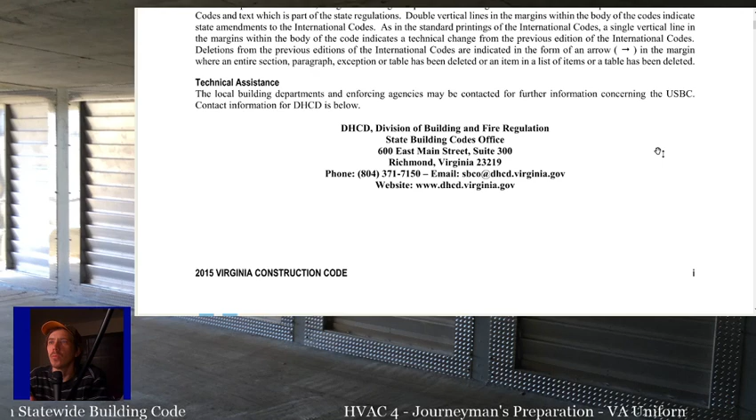But right now we are still governed under the 2015 Virginia Construction Code, or the 2015 Virginia Construction Code, which was adopted in 2018. So again, they named the year of the construction code, or the VA USBC, the same as the building codes that were adopted, and that is usually 3 years behind. So again, this was adopted in 2018, and it's the 2015 code. All right.

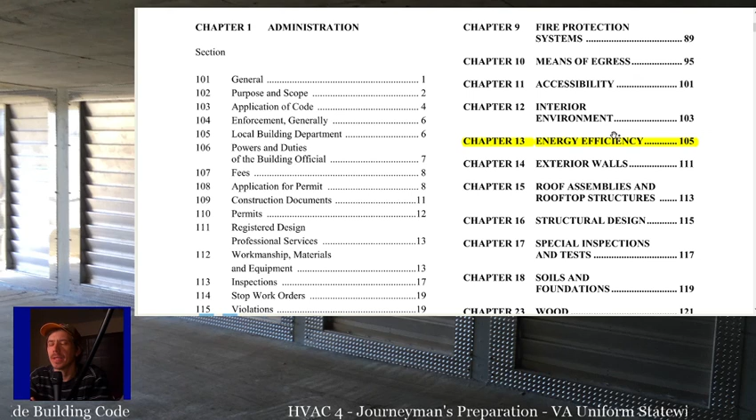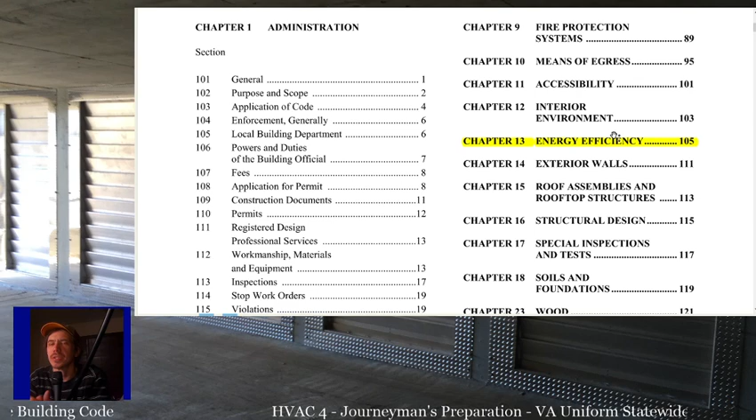And that's mainly because, like I said, the new codes come out, and then over the course of a few years, they double check everything, have meetings, and decide what changes they want to make to the building codes to be adopted in Virginia. So they discuss all these things, and it's a long process.

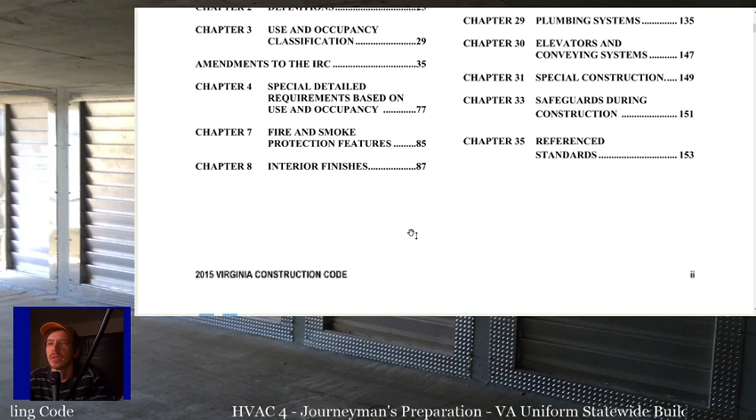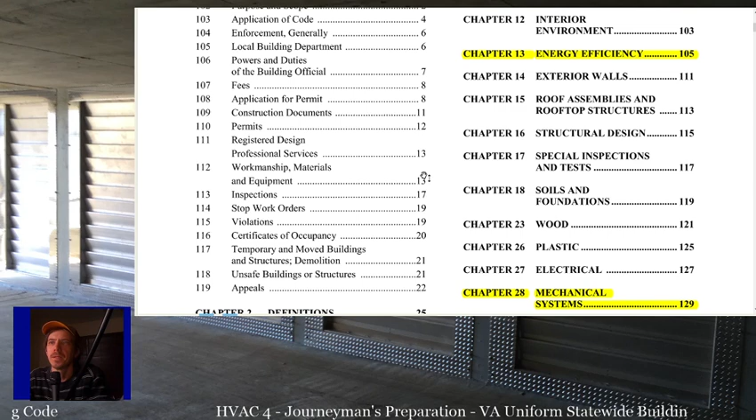All right. So the most important things as far as mechanical are general, energy efficiency, and mechanical systems. That's the most important one. That's all we're really going to cover here. There are a lot of changes to the building code itself. It's not a super ton, but the building code changes are probably 90% of this. The trades codes, like mechanical, plumbing, electrical, usually don't have so many, but there are a lot of changes in the building code itself.

So first, talking about general changes, incorporation by reference. This is where they incorporate the building codes into the Uniform Statewide Building Code. So what this says is chapters 2 through 35 of the 2015 International Building Code, published by the International Code Council, are adopted and incorporated by reference to be an enforceable part of the USBC.

That means anything that's in the International Building Code is incorporated into the Virginia Uniform Statewide Building Code, except as changed by this document. So if you only have the generic copy of the International Building Code, you have to reference the VA USBC with the building code to determine what's actually part of Virginia.

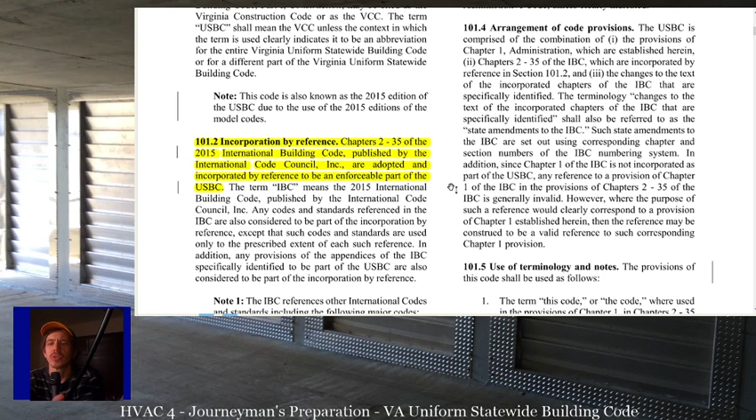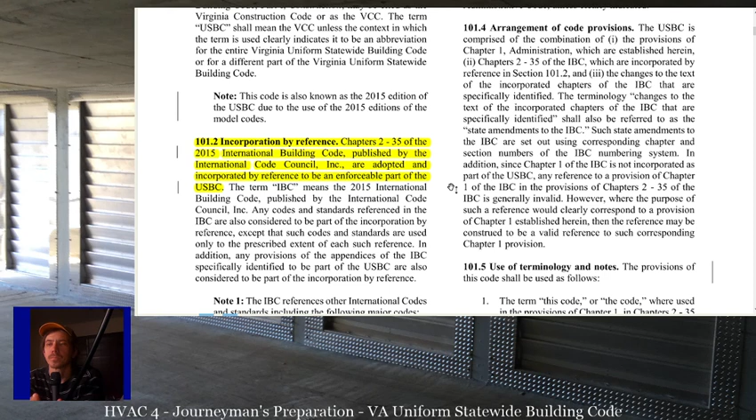But if you go to the Virginia codes on the International Code Council website, or better yet on UpCodes, which I'll show in another video after this, the Virginia codes online will already incorporate all these changes. But if you're referencing the generic international code, you need to look at what's incorporated in Virginia and what's just in the International Building Code.

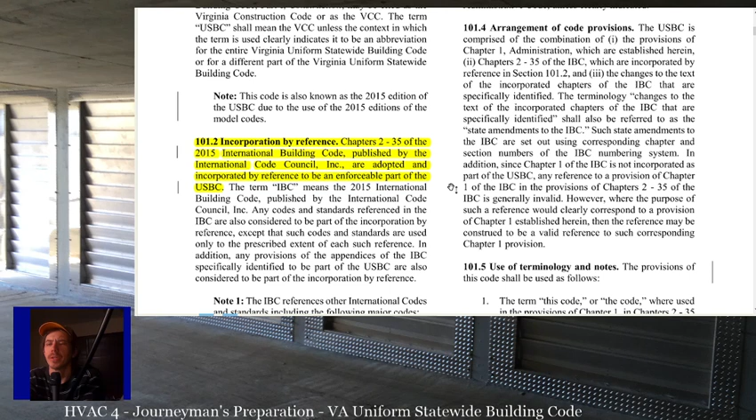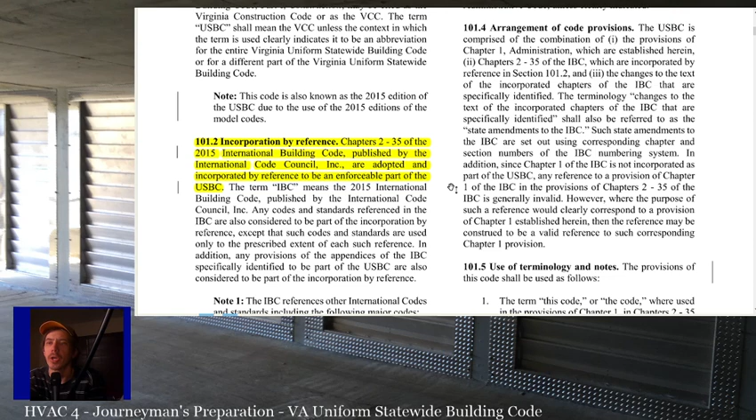Chapter 1 is never incorporated by any jurisdiction. Chapter 1 of the international codes is all administration, and administration is done by the individual states. So almost every state just deletes Chapter 1. Chapter 1 is irrelevant in pretty much every building code. But chapters 2 through whatever are incorporated. A lot of times they don't incorporate the appendixes. Appendixes are usually not part of the code. So they'll outline the actual chapters.

And then the building code references other international codes, and they get incorporated into the building code: the plumbing code, the mechanical code, the fuel gas code, the energy conservation code, and the residential code. Notice that it's not the international electrical code that's incorporated. Pretty much every state follows NFPA 70, which is the National Electrical Code. So NFPA 70 is what we follow for electrical. We don't follow the international electrical code.

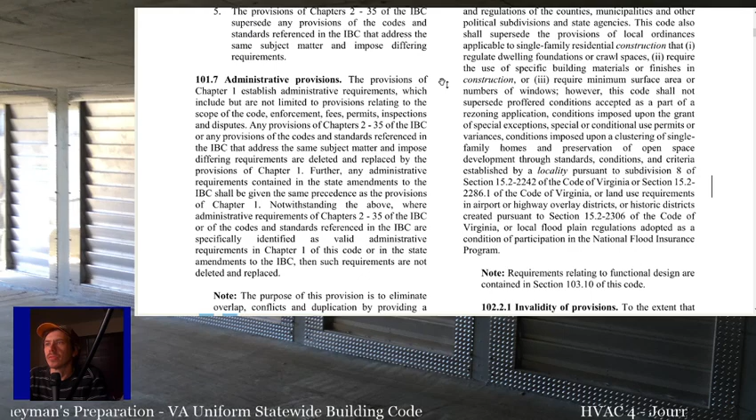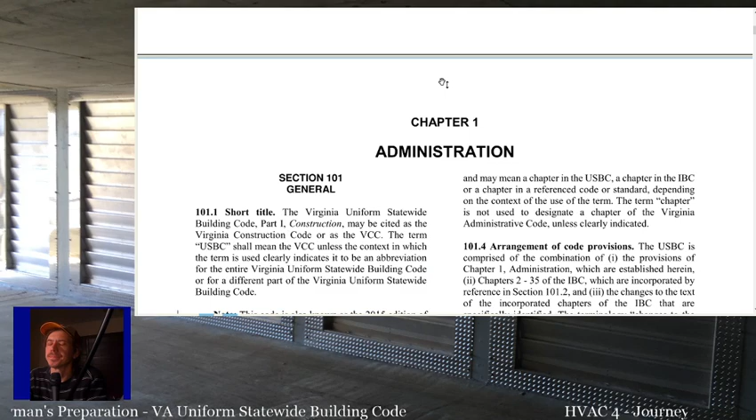And that's really all in general that's really important right now. There's a lot of other interesting information in here, as far as application of the code and things like that, but not so relevant to our trade in particular.

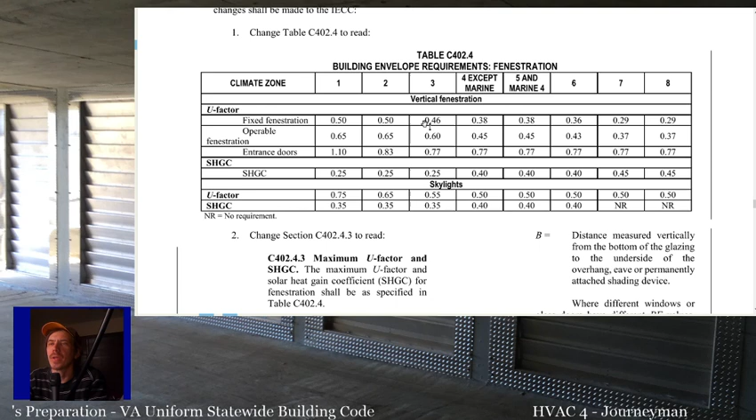Okay, so real quick, I want to talk about the energy efficiency changes. If you go into energy efficiency, there are some things that apply to us as mechanical contractors. Number one is if you're looking at envelope requirements for fenestration, there's a map of the climate zones. I forget which one we are. We're 4 or 5. I'm going to have to look at that map. But anyway,

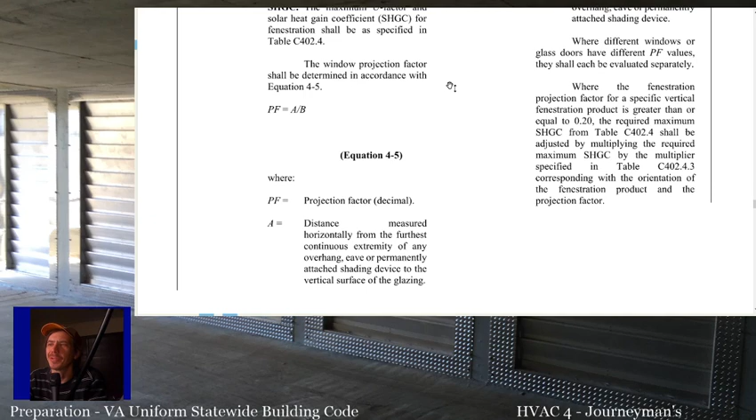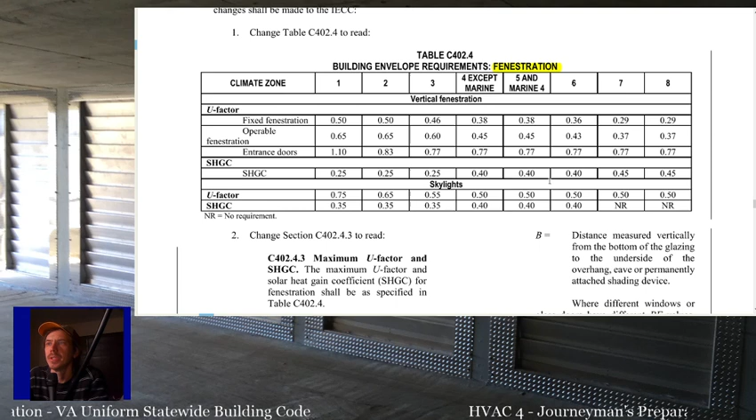these are the minimum requirements for windows in the area. So you're generally going to see you have to meet these U factors and SHGC values for windows. Fenestration, remember, is just a fancy word for window. So this is the envelope requirements as far as U factors. So you can't put in windows or skylights or anything that don't meet these.

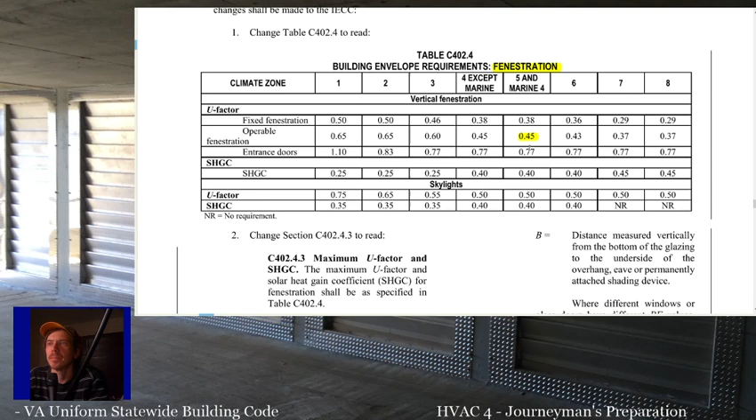So operable fenestration, I believe we're here at a 0.45 is the maximum U value. So you can have 0.45 and under, but not above that. Most people exceed this requirement. As a matter of fact, most people end up shooting for 0.38, not the 0.45. Ceiling R values are 38. There's other stuff in here.

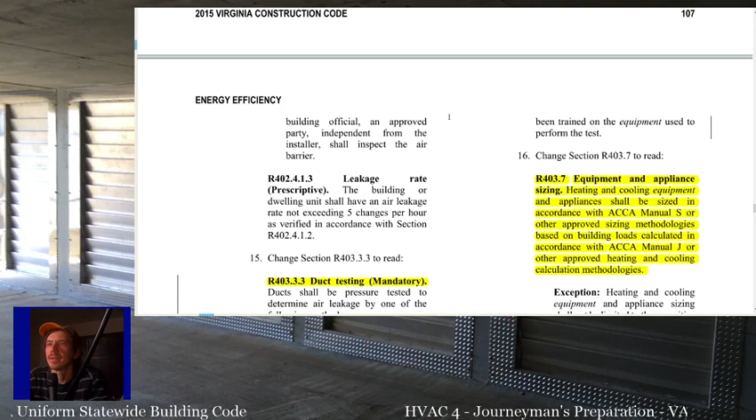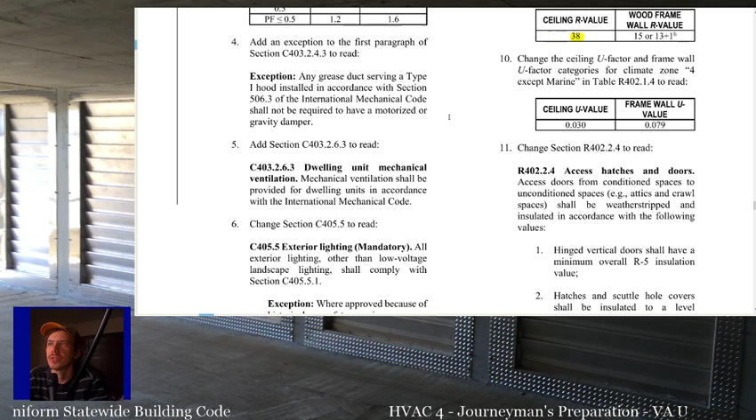And then where is it? Did I highlight it? Oh no, because it's actually in the energy conservation code. If you go to the energy conservation code, it gives you the minimum R factor for duct insulation, which is R8 in an attic, and I think R6 in a crawl space, and everywhere else there is none. But that's where you get R8 in an attic is the requirement for duct.

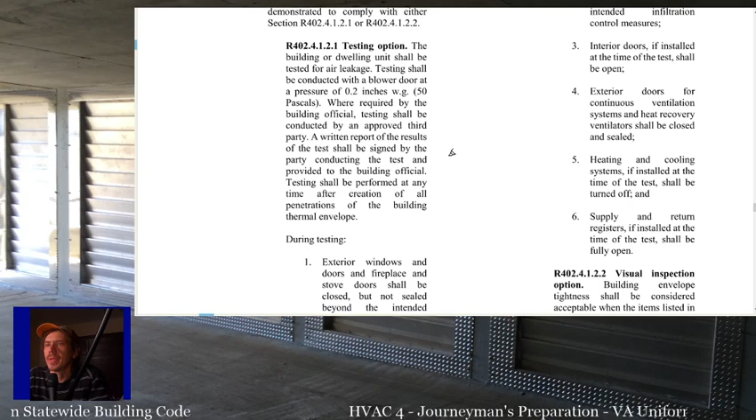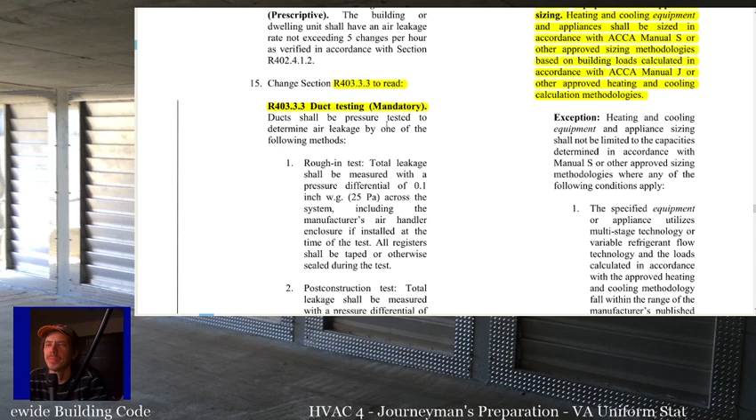And then the other change that Virginia makes for mechanical on the energy conservation code is duct testing in Virginia is actually mandatory. Duct testing is mandatory in all applications basically, but in residential you're supposed to test your ducts for leakage after they've been installed on a new installation. This doesn't get enforced much, but technically you are supposed to always test the duct leakage.

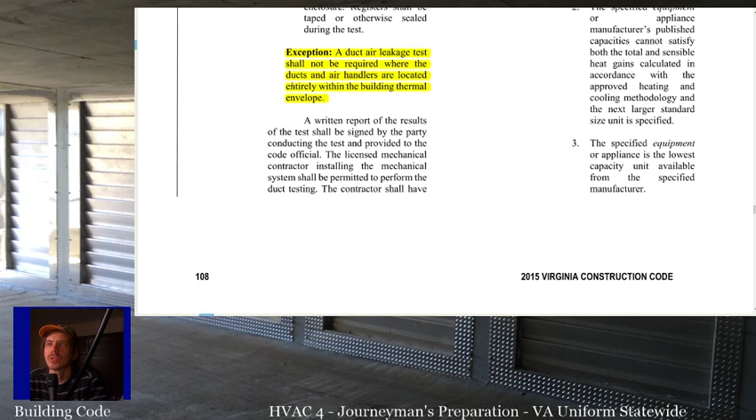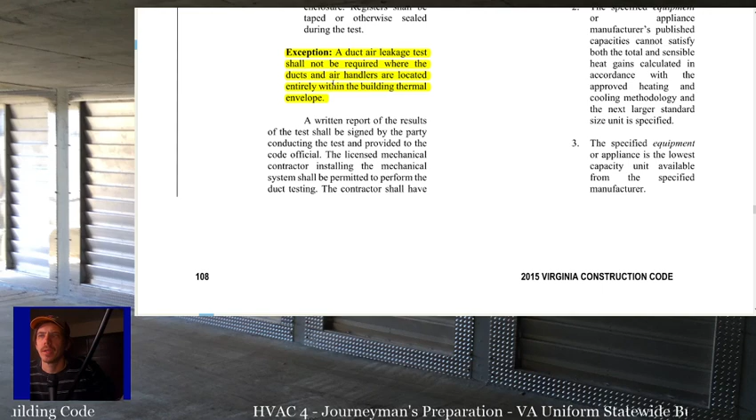The exception is a duct air leakage test is not required on a final inspection if the air handlers and the ducts are entirely located within the thermal envelope. So if they're not in the attic, not in the crawl space, if they're all inside the building envelope, then you don't have to test the ducts. But anytime you put a duct in an attic in Virginia, you're supposed to test it. So keep that in mind.

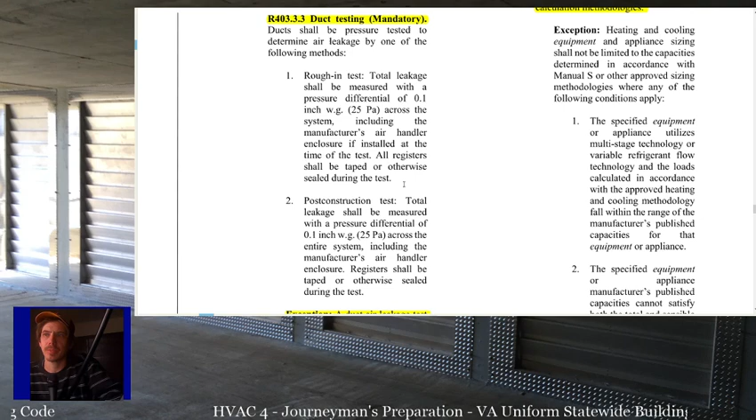I haven't seen any jurisdictions actually enforce this, but they could start doing so at any time. And I'm sure there are instances where they do. And a lot of contractors will make you do this anyway if you're doing a lot of tract housing or something like that. But technically, you're supposed to always test your ducts if they're not inside the building envelope.

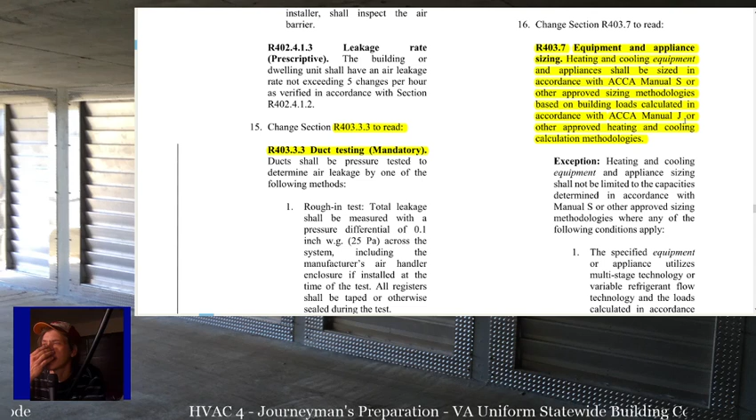And then this is where equipment and appliance sizing, they reference Manual S and Manual J. So if you followed my Manual J stuff, you know that I told you that it's part of the code. So our code book isn't just as simple as the International Mechanical Code. Actually, think about it like this. Our code book is the VA USBC, which dictates everything else.

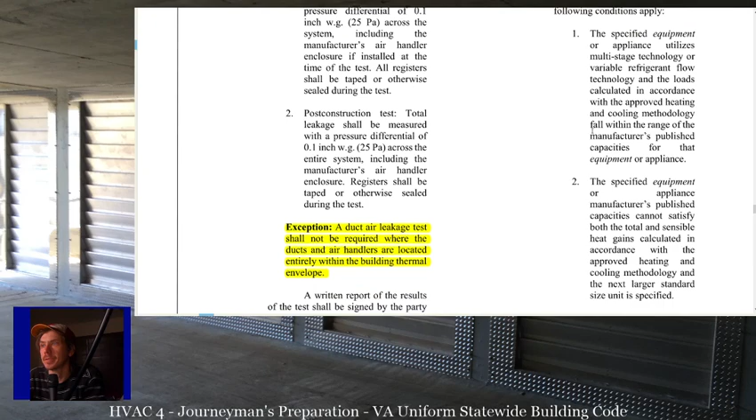And by that reference, we get the International Mechanical Code, the International Energy Conservation Code, ACCA Manual S, ACCA Manual J, ACCA Manual D, and all that stuff. And then there's some ASHRAE standards for commercial stuff. So our code book isn't one book. Our code book is multiple books that you're supposed to understand. So that's energy conservation stuff. All right.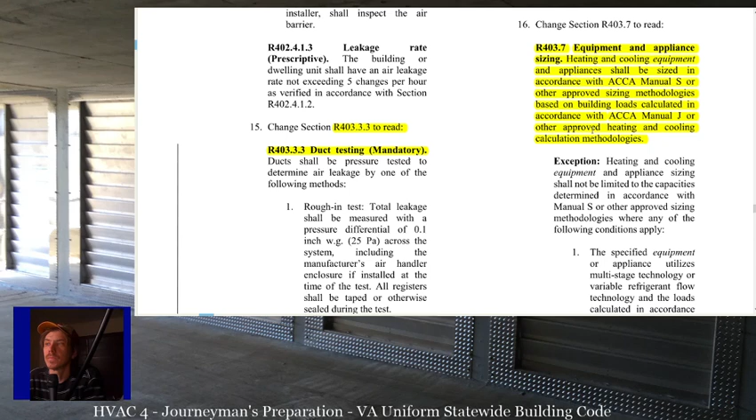The only time you don't have to follow Manual S is if you have variable speed systems and things of that nature, but you still have to make sure they're within the requirements of Manual S. Basically, you still have to make sure that the cooling and heating ranges fall within the capacities of the equipment. So that's that. And then mechanical systems.

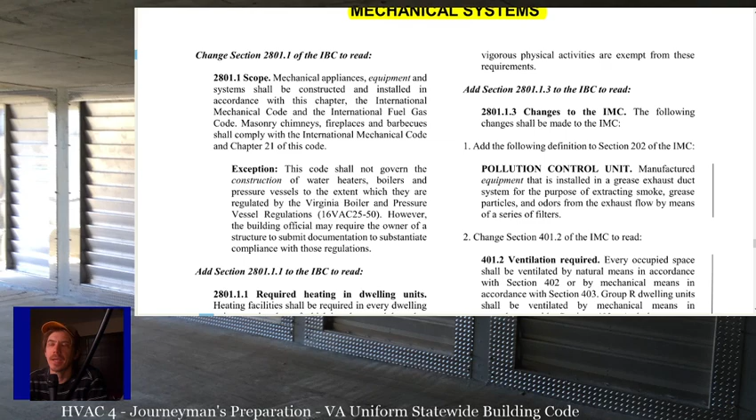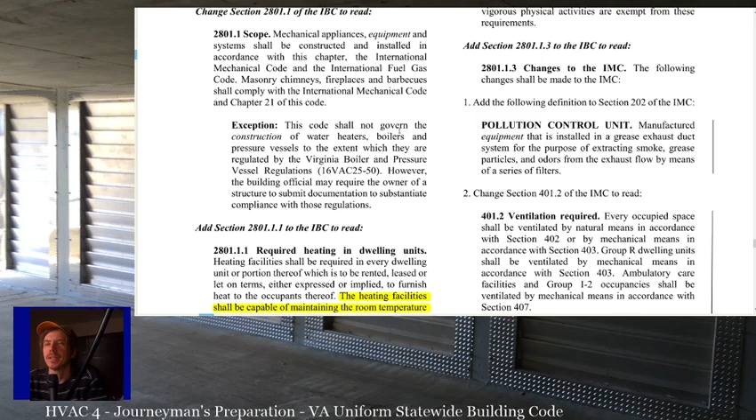I highlighted a couple things here. They're not actually that important, but it's kind of interesting, right? So these are all the changes to the mechanical code. So anything it says here are changes that they make you make to the mechanical code. So the mechanical code is all incorporated into the Virginia Building Code except for these changes. Sometimes it adds a section, sometimes it deletes a section.

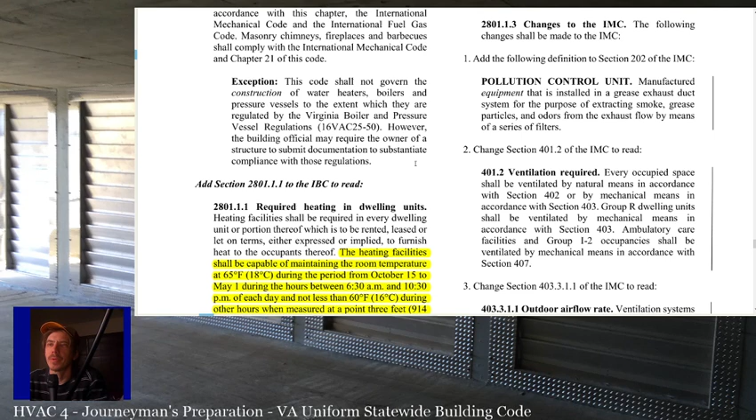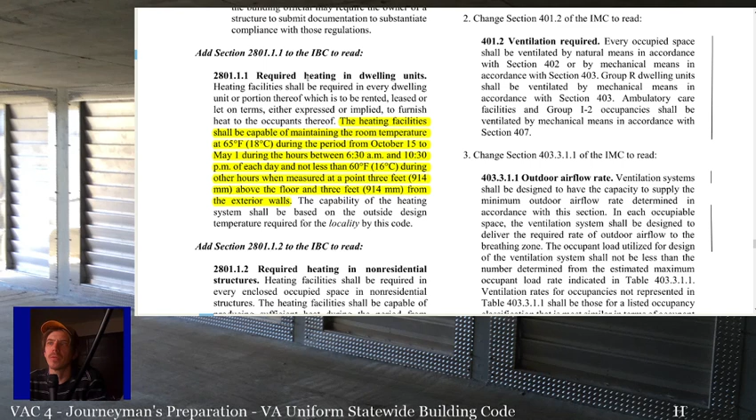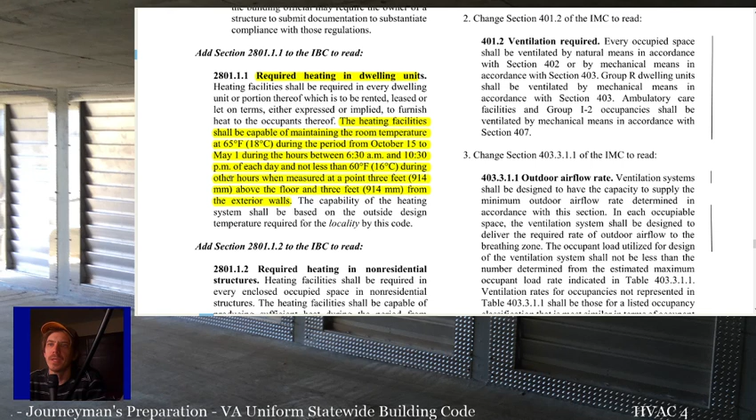Part of this is part of the building code, some of this is part of the gas code, but they're all incorporated as part of mechanical systems. So for instance, there's a section in the IBC about required heating in dwelling units. This gets added to it, so the heating facilities in a dwelling unit or a residential construction basically have to be able to maintain a room temperature of 65 degrees during the period from October 15th to May 1st from 6:30 a.m. to 10:30 p.m. of each day, and not less than 60 degrees during other hours when measured at a point 3 feet above the floor and 3 feet from the exterior walls.

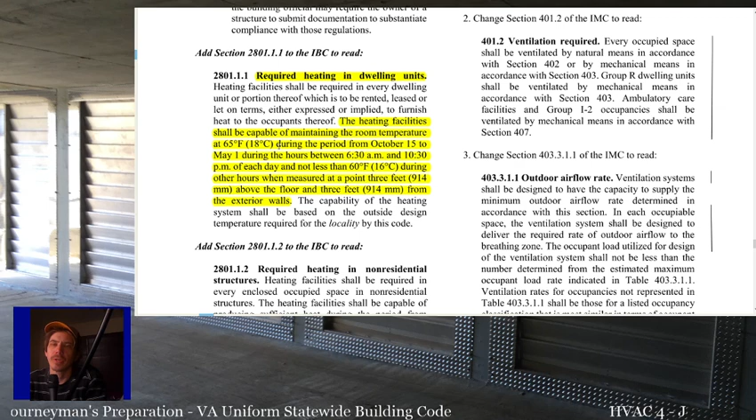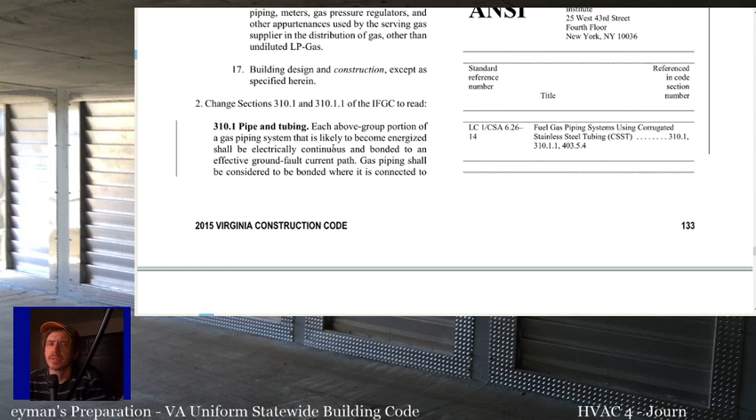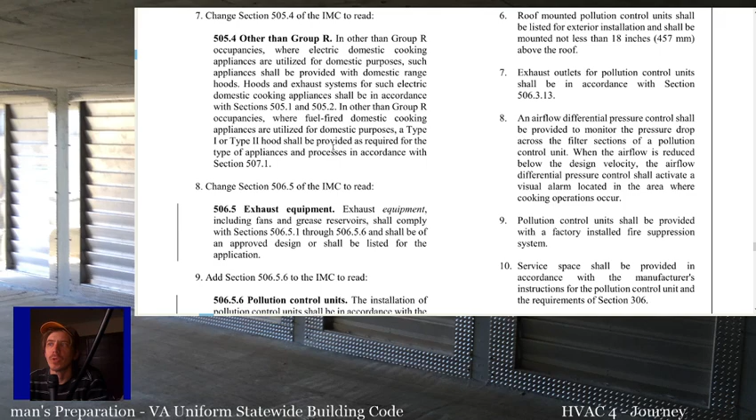So a good application for this would be, say you're renting a house. If the landlord doesn't have a heating system in there that can meet these requirements, they're in violation of the building code. And then there's other changes in here you should read. Usually I always reference the actual Virginia codes anyway when possible. I don't reference the generic international codes because it's better to just follow the Virginia code, because all these sections get added in there for you. But if you do have a generic code, then you want to look at the VA USBC and determine what changes there are, because some things get changed.

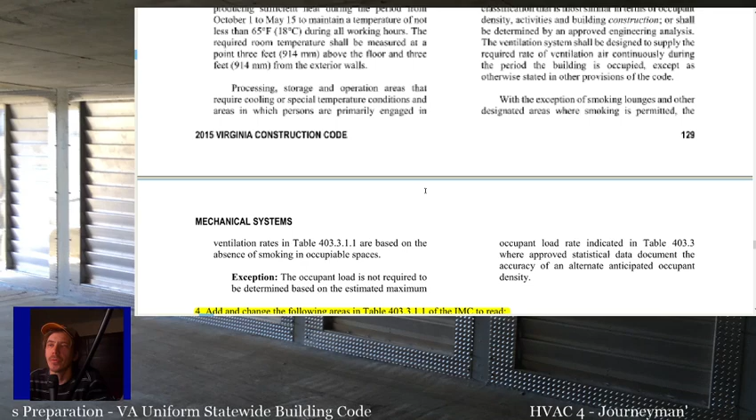All right, like here's some changes to Table 403. When we go over ventilation, there's some requirements in Table 403, and you have to add these requirements to them so that you know what the actual ventilation requirements are, and so on and so forth. So these are the changes to that code.

Now, the most interesting thing for us as tradesmen, a little known fact to some people. The other thing you'll want to know is the related laws packages. So in 2015, the Virginia Building and Fire Code Related Regulations, that's what this is. You'll want this related laws package because it has important information in here. It's not a lot. There's not a ton of things you need to know out of this related laws package, but there are a couple interesting items.

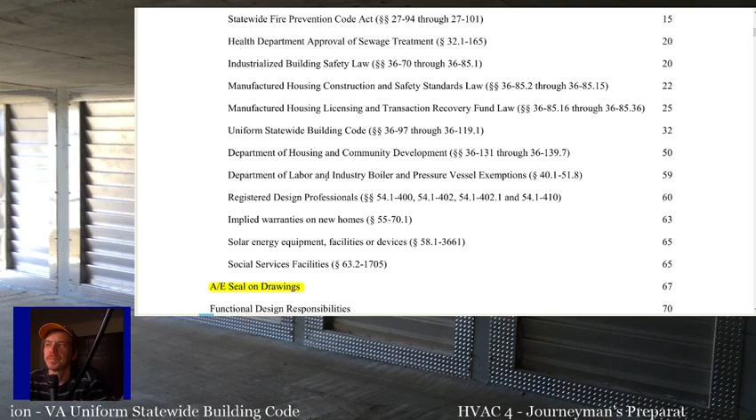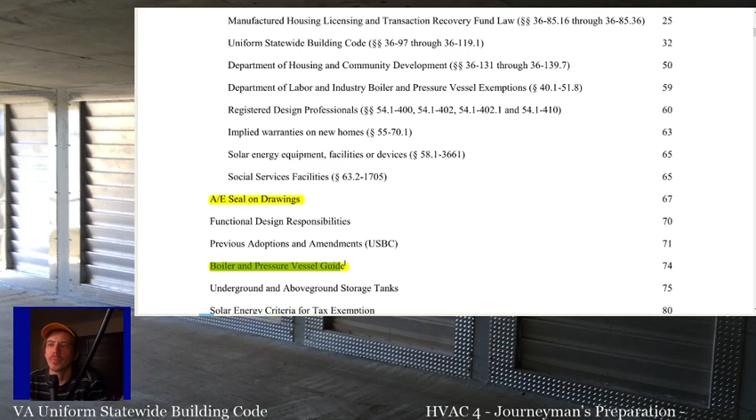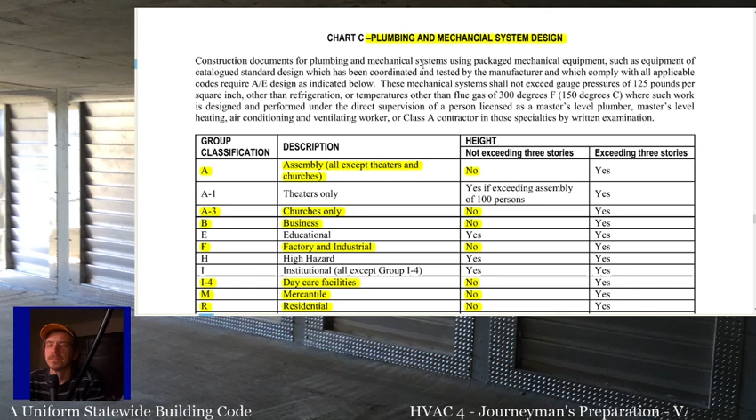Here we go. It didn't want to load. Alright, so there's your table of contents. There's a bunch of stuff in here about solar equipment and things like that. Not too important. What I think is interesting out of this related laws package is the AE seal on drawings, and you want to know about the boiler and pressure vessel guide. So if we go to AE seals on drawings, you'll want to go to that section and then find chart C. These are the requirements for architects or engineer seals on drawings.

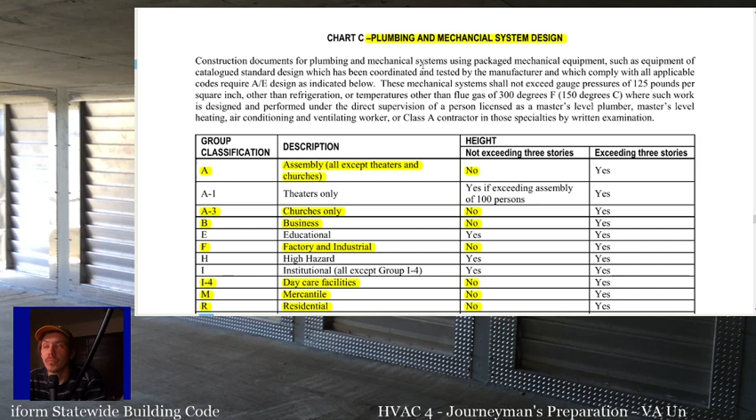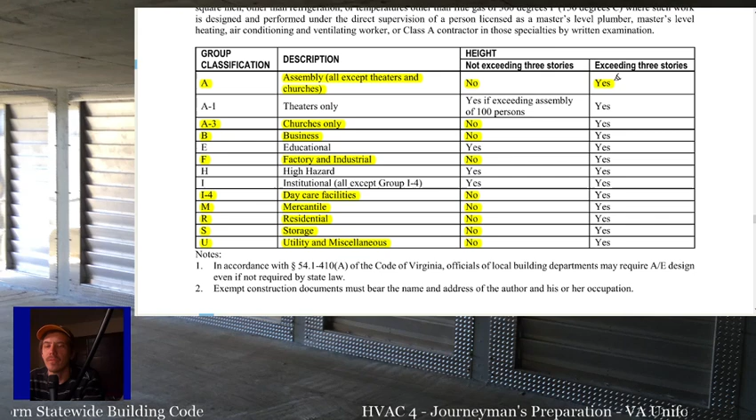And what this is for is, say you want to design a building yourself. You're a master tradesman. If you're a master tradesman and a contractor, then you can design the mechanical systems for some buildings yourself. It doesn't have to be done by an engineer, but there's certain things you need to know. So basically just look at this table. If this table says yes, then that means you have to have an architect's or engineer seal. If it says no, that means that you can design that building as a tradesman.

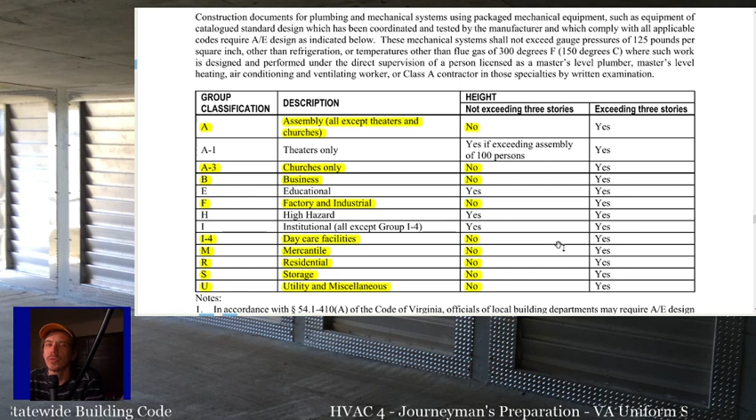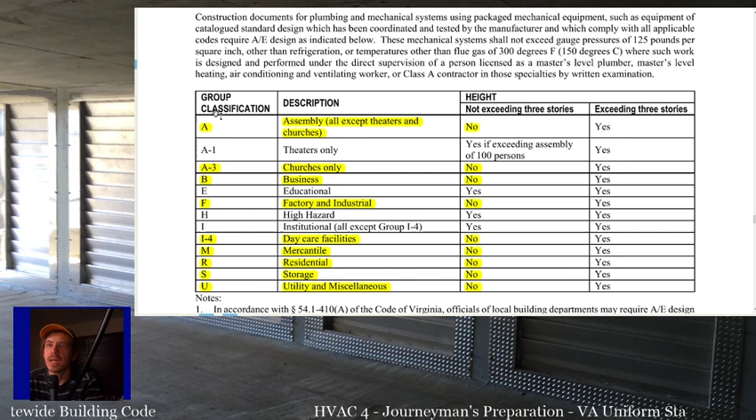And I think they changed this requirement, because I remember them always indicating it had to be an occupancy of less than 100 people, but now that's only for theaters. So basically you can design any building under 3 stories. That's for assembly, churches, business, factory or industrial, daycare, mercantile stores, residential, storage or utility. You can design those buildings as a master tradesman. They don't need an engineer to do it.

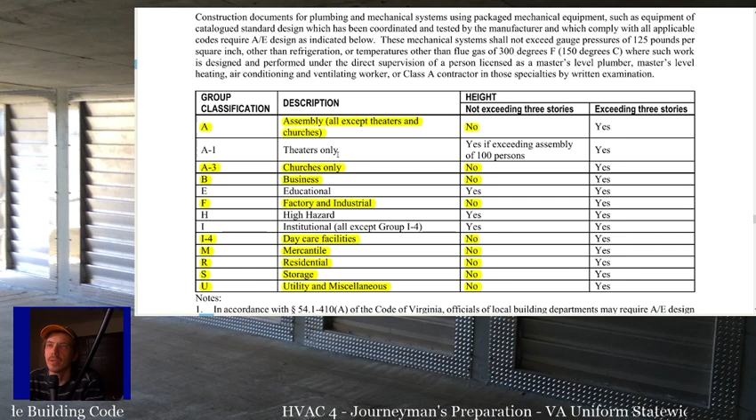So if you're capable of following the requirements to design the heating and cooling within a facility, you can do so as long as the building is not one of these types. Theaters over 100 people; you can do theaters as long as it's less than 100 people. Alright. It's not educational, so you're not allowed to design schools. Can't be high hazard, so explosive materials and things like that.

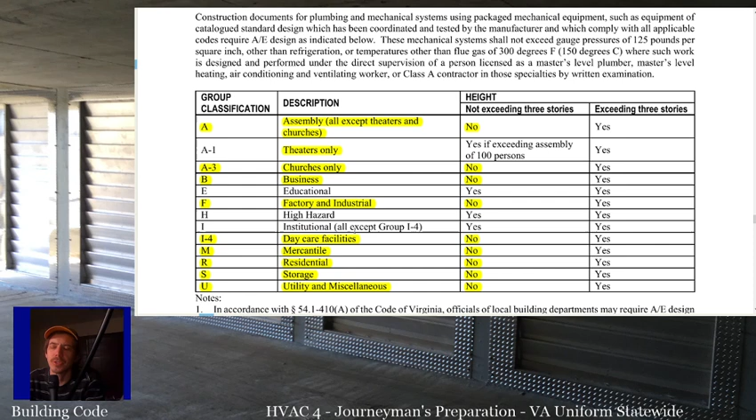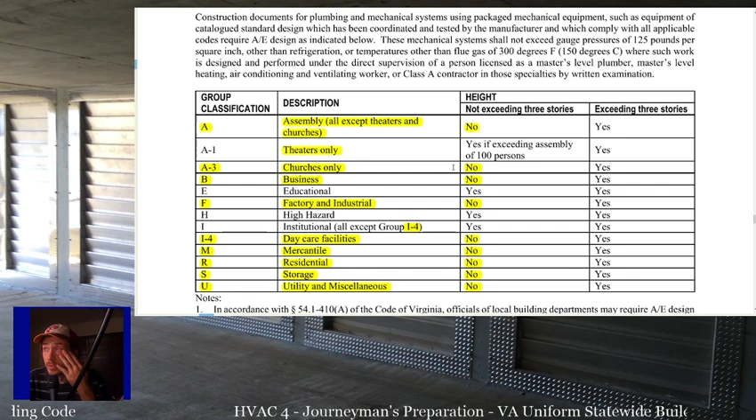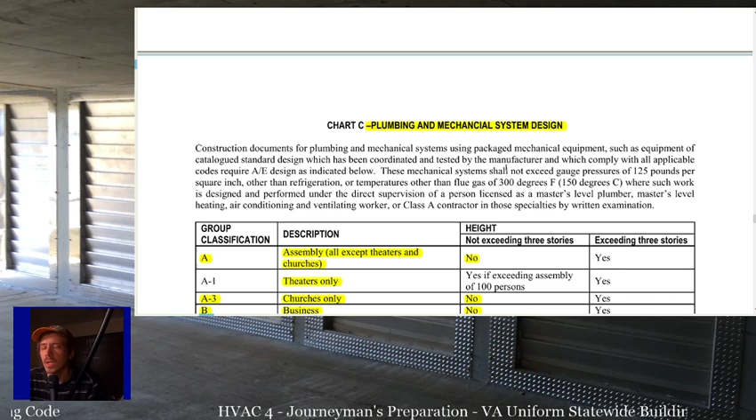And institutional except group I4. Everything else you can design as a master tradesman and sign those drawings yourself, and there's no need for an engineer on that project. So this is what this table tells you. So if you ever need to know whether or not you can design a building without getting an engineer's stamp, then this is how you find out. In the related law package, it gives you this table to let you know what you can design.

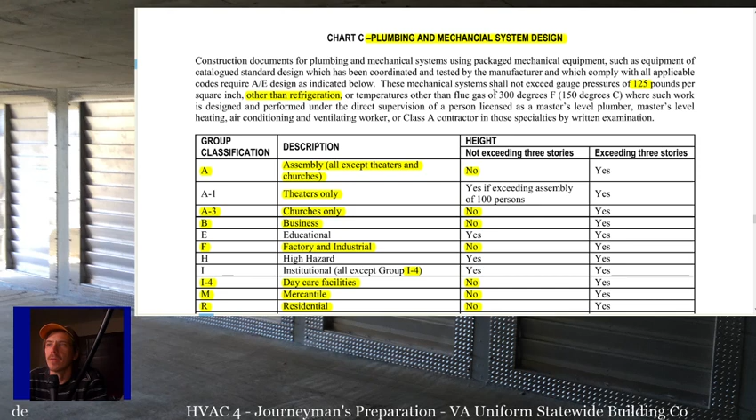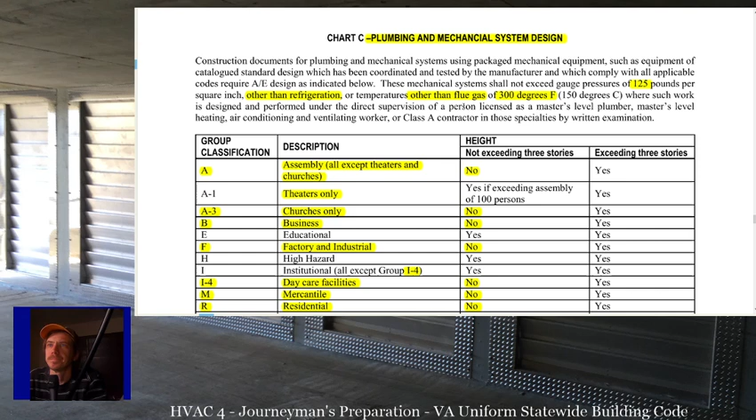The other requirements, if you read through this, is that the mechanical systems can't exceed 125 psi other than refrigeration. So you can't design a boiler system that operates at 150 psi, and you can't have flue gases that exceed 300 degrees. You can't have temperatures other than flue gases which exceed 300 degrees. The work has to be designed and performed under the direct supervision of a person licensed as a master level plumber, master level HVAC worker, or a Class A contractor by written examination.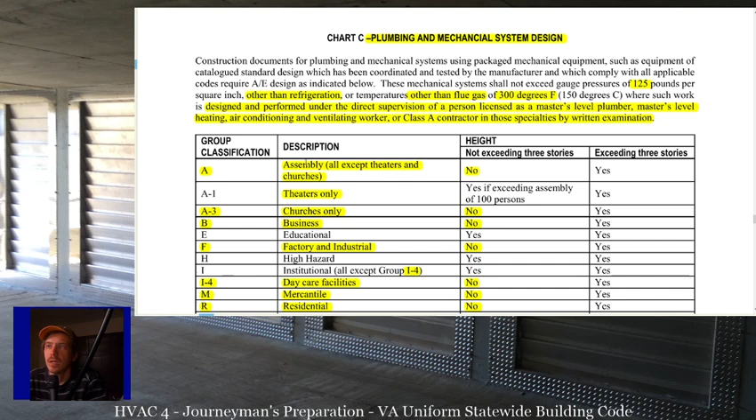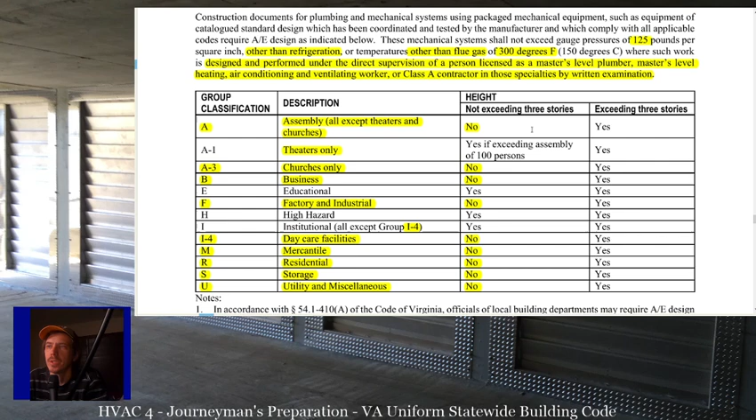So I've done this multiple times. I have actually done changes to drawings before and sent it in for approval when an engineer doesn't get something done quick enough and I want to get changes done. You can just basically design it yourself and send in the changes. A lot of smaller commercial buildings, nail salons or something like that, just do the mechanical design on it. No big deal. As long as you have the right tools, you can get it done. You don't need an engineer.

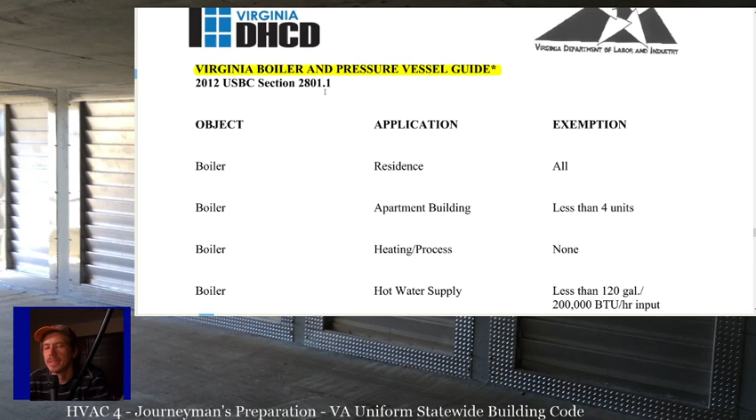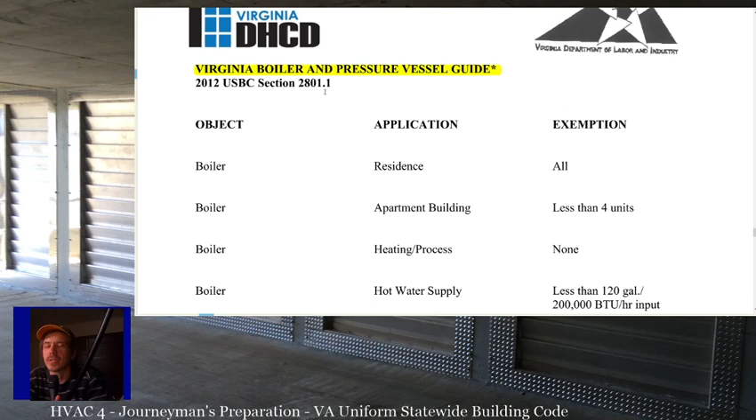The last thing is the boiler and pressure vessel guide. Everybody should know about this if they do plumbing or HVAC. Basically, anything in here needs to have a boiler certification. There are people in the state that are licensed to certify boilers. So anytime you've got a boiler or pressure vessel, it needs to be certified, unless, if it's a boiler for hot water supply, then if it's less than 120 gallons or 200,000 BTUs input, then it doesn't have to be certified.

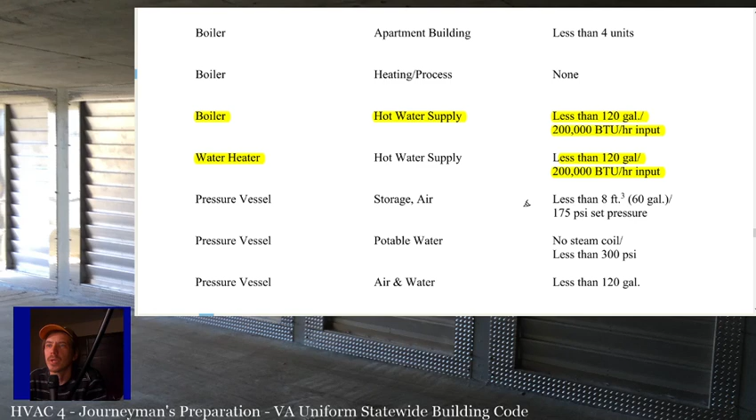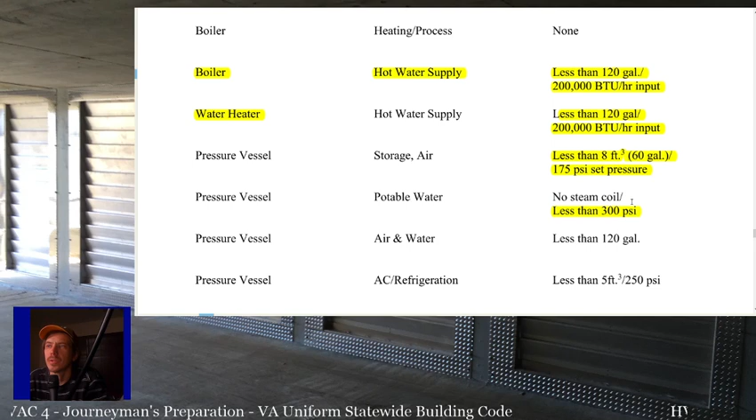A water heater, same thing, less than 120 gallons or 200,000 BTUs input. And then pressure vessels for like air, if it's less than 8 cubic feet or 175 psi set pressure. Potable water, if it's no steam coils, less than 300 psi. Any pressure vessel that's less than 120 gallons. All those don't have to be certified. Anything else is supposed to be certified.

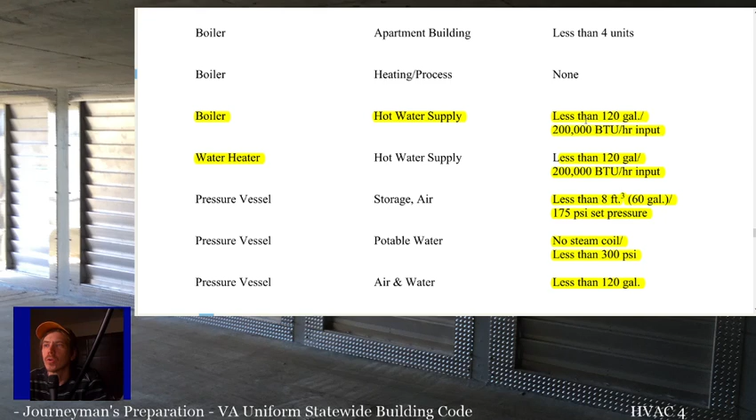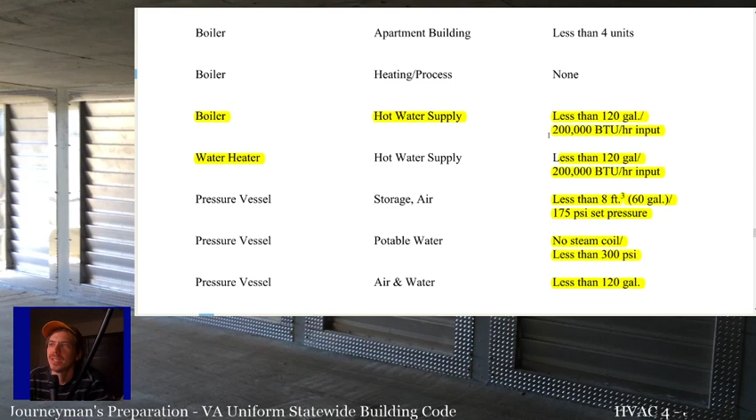This is another one of those things that's kind of hit or miss. Just because you put in a 150-gallon water heater and the inspector didn't ask for the certification doesn't mean it shouldn't have been done. But if you ever wondered why there's so many 199,000 BTU boilers or water heaters, why the tankless water heaters stop at 199,000 BTUs, it's because this is a very common requirement. Things need to be less than 200,000 BTUs, or you have to get that thing looked at every few years by a boiler inspector. It might even be every year. It's been a while since I did a job that needed one.

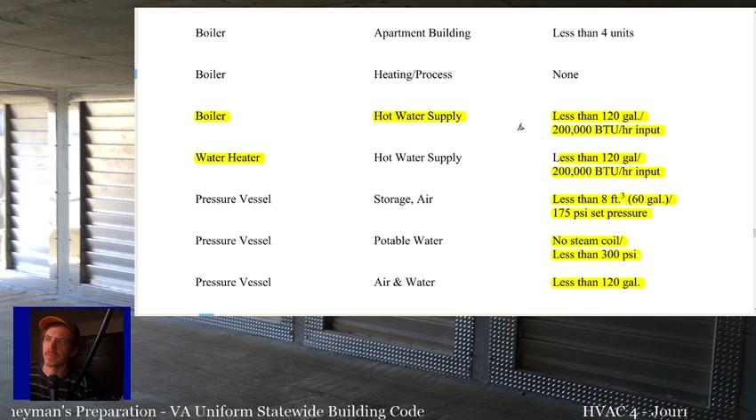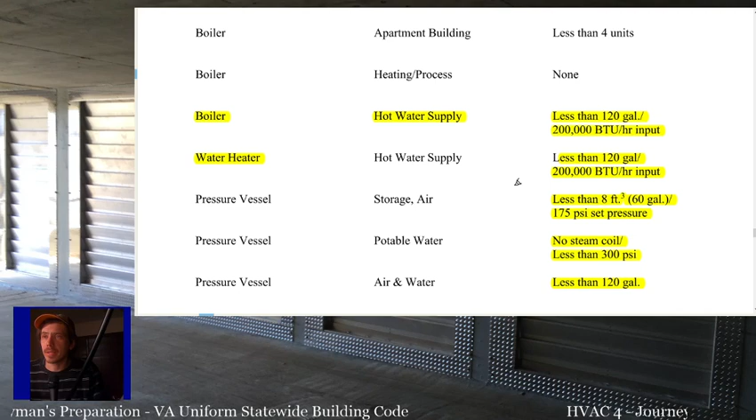But yeah, if the pressure vessel falls under this, you have to have a certified boiler inspector look at it. Otherwise, it's not required, and that's where this comes from. So you should know that in case it ever comes up, you understand it's a thing. And you can get a hold of, I want to say it's the Department of Housing and Community Development. The code department usually keeps a list of certified boiler inspectors if you ever need one, so that you can hunt down someone's number and get them to look at it.

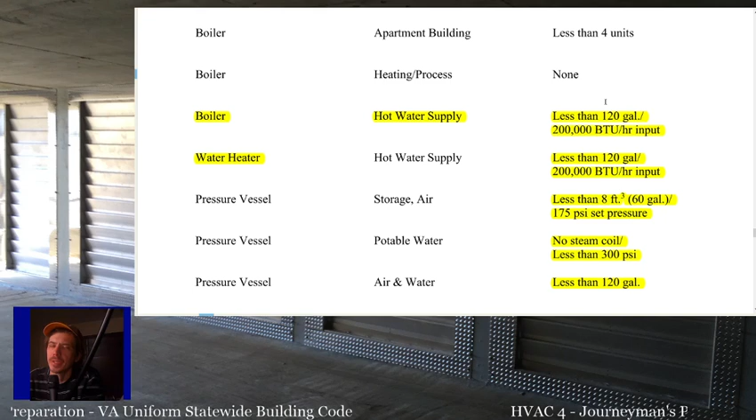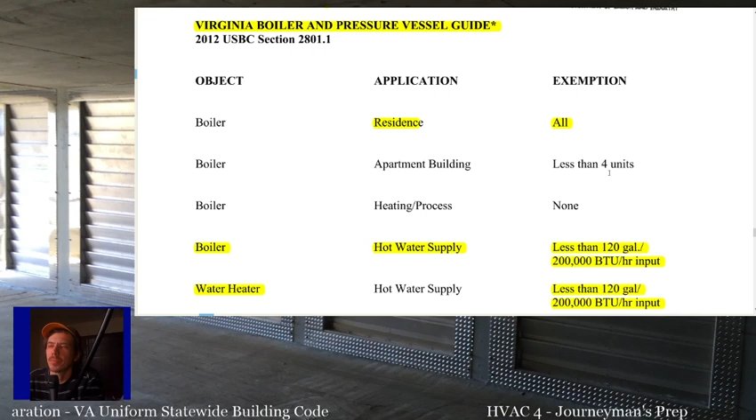There's not that many. I don't know if it's a good thing to get into. I don't know how many times it actually gets done, but yeah, they keep a list for you in case you got to call somebody to do it. It's a whole separate certification. But this is when you need it. Anytime you don't meet any of these exemptions. All residential boilers are exempted. Boilers in apartment buildings that have less than 4 units are exempted. And so on and so forth. So that's where that comes from, just so you know.

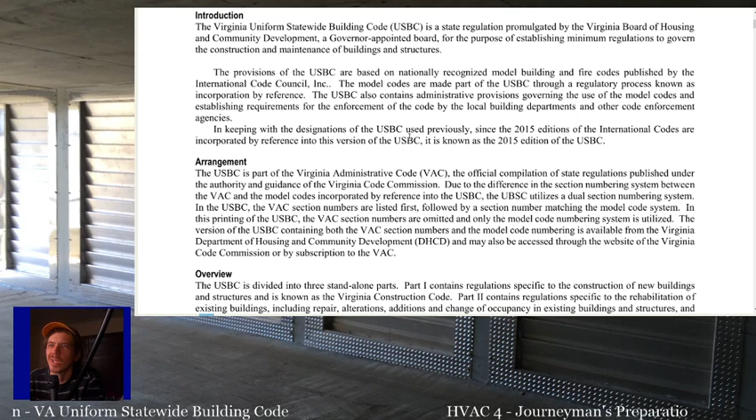But anyway, I encourage everybody to look through the Uniform Statewide Building Code at least once. Give it a good, cursory look at all the pages and see how it's set up and see what's in it. There are some interesting things in here other than what I just covered, but this is how we get to the international codes. This is how we end up adopting them, through the Uniform Statewide Building Code. And again, this is issued by the Department of Housing and Community Development, whereas licensure is the Department of Professional and Occupational Regulation. So DHCD handles the code, DPOR handles the licensing. And there you go. Virginia Uniform Statewide Building Code. There's your crash course.